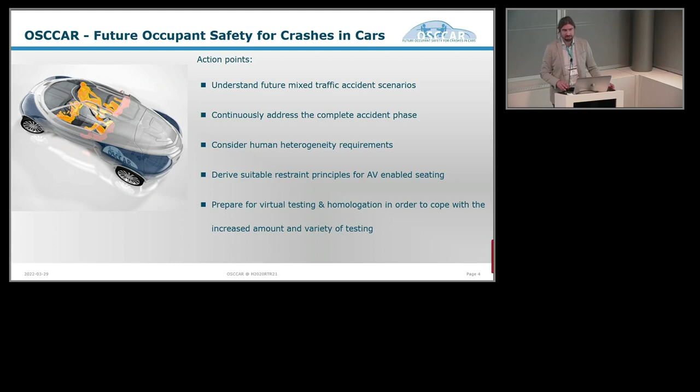And in order to do that, we also had our action point in preparing for virtual testing and homologation, to cope with all this future amount of safety assessment and homologation needs. Therefore, OSCCAR's main objective: understanding future accident scenarios, demonstrating new advanced protection principles, looking into the diverse omnidirectional biofidelic and robust HBMs as one solution for assessing occupant safety and future occupant safety.

Next to the currently used crash test dummies and all well-known crash test dummies, we establish an integrated virtual assessment framework so that we can address complex scenarios for in-crash, pre-crash and mixed traffic scenarios. And to do all that, establish standardizations, paving the way for standardizations for virtual testing procedures that entail and incorporate HBMs and future aspects on all of this.

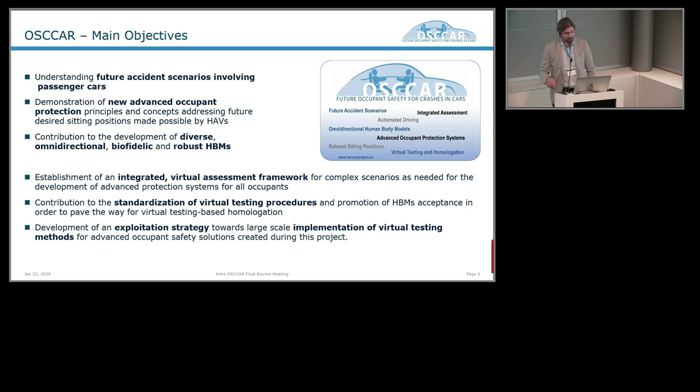You will notice this is all still very much ongoing work, and the world is getting a big step closer to that. As this is a European RIA project, also focusing very much on fostering the European industry, we also develop an exploitation strategy on implementation of all our results, virtual testing and methods in this context.

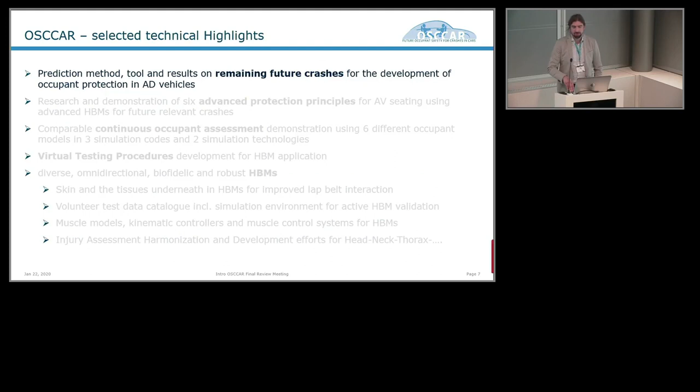Okay, that's what I'm going to talk about today. Just as a summary here, the first part: future remaining crashes in mixed traffic scenarios.

Amongst others, some of our highlights: we were able to simulate future traffic scenarios, not only doing accident research based on already happened accidents, but really looking into the future. Therefore, an open source tool was further developed based on COVISE and openPASS. It can be downloaded, looked at, and used by everybody here for further work.

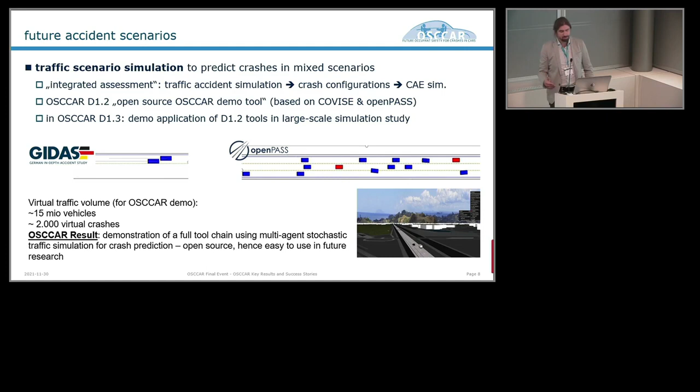In this context, for example, we were simulating 15 million vehicles, leading to about 2,000 crashes. And from that, and lots of other simulations, we were able to predict some of the more relevant future accident scenarios that are going to happen and are relevant for future vehicles.

And those are mostly crossing scenarios. So we're talking here about the straight crossing path scenario and the left turn across path scenario that, apart from what we currently do and what we currently need, will be the main challenges to address.

Just think about sitting in a car and being hit perpendicular to your side or to the other side. So you're not loading the current restraints accordingly, and not optimally protected. In this context, OSCCAR was also able to develop a lot of generic pulses based on state-of-the-art vehicle models that are also free for use and can be downloaded and used here.

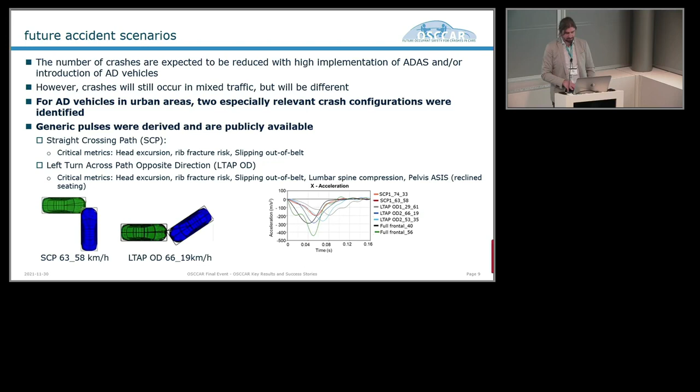Next point, I would like to talk about advanced protection principles we were looking at. Six of them with lots of subgroups, even more diversifying our results here. We were looking at pre-rotated seats, seat inertia, so turning people back into principal direction of force.

Looking at very heavily reclined occupant positions up to sleeping positions for, as you can see here, a very diverse set of people, from very obese to very small, even very small Asian female people, so really smaller of the smaller and going up to the bigger of the bigger ones.

Looking at some kind of living room conditions, having active seat backrests in our vehicles or in our models mostly. And we were also looking at the far side load case that especially Euro NCAP is focusing currently on.

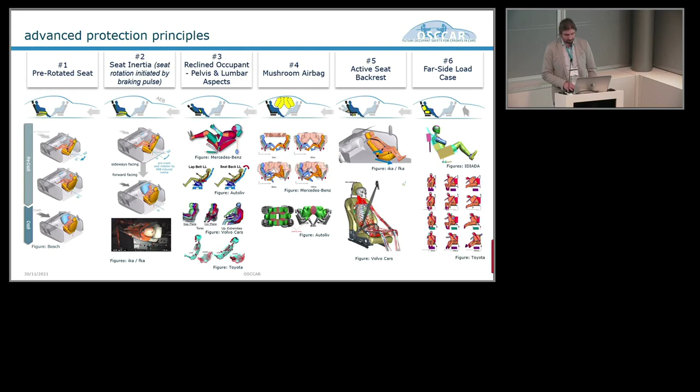All these protection principles were looked at using advanced state-of-the-art human body models, in some cases, or in many cases, models that were even further developed within the OSCCAR project. In order to continuously assess occupant safety,

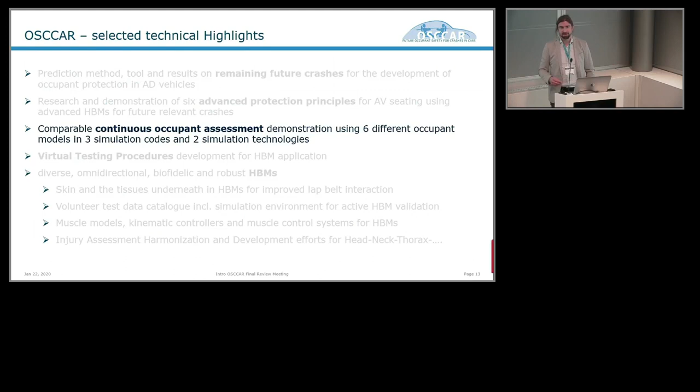you need some kind of tool, some kind of strategy, some kind of method on how to do that. So therefore, OSCCAR was able to develop a positioning tool that can sit all kinds of, or nearly all kinds of HBMs into a standardized or a specific seating position.

This tool is available for download for use, based on Piper, a former European project. Then we are able to provide a kinematic transition from pre and in-crash, not only for finite element models, but also for multi-body to finite element models, for those simulation freaks amongst you - rather complicated and important stuff, benefiting from different calculation speed here.

And we were also able to provide a homologation test case, a comparison test case that compared occupant model capabilities using 3 different solvers and 6 different HBMs in 2 scenarios, pre and in-crash here. So a rather broad portfolio of use cases that can be further worked on and further looked at in future projects and directly go into development here.

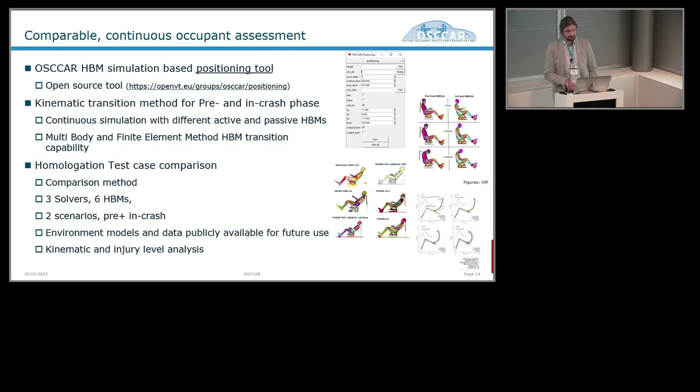Colleagues of ours worked on virtual testing procedures, building originally on projects from many years back for those long-term virtual testing applications here. Very important, virtual testing will not substitute testing.

So there will always be physical crash tests for validating models, for understanding basic feasibility, but we will need virtual testing in order to look at the diverse occupants and new seating positions, where current crash test dummies simply go to their limits.

So we provide here a method how virtual testing can be applied in the future, and I really invite you to look into detail at how this is going to look, and most likely in this or a very similar fashion it will be adopted by Euro NCAP in the next couple of years.

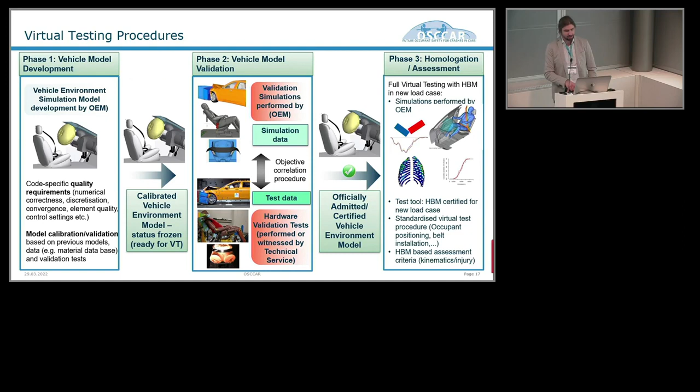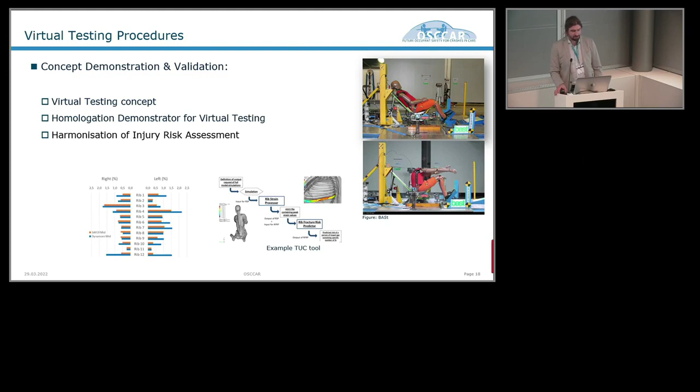Part of this was, amongst others, some physical testing, in this case a very reclined position with a dummy. And important parts here for virtual testing: assessment of injury risks and homologation test case concepts.

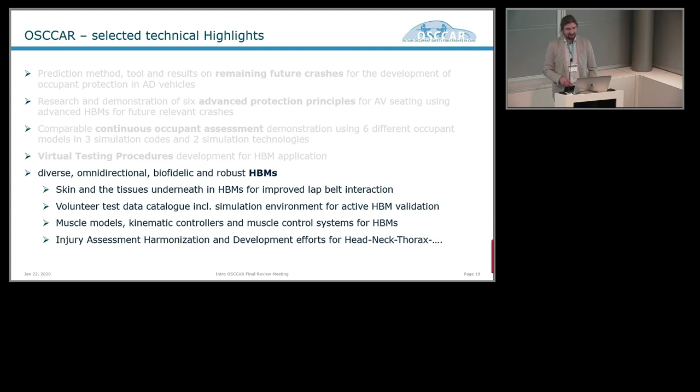And last but not least, as I already mentioned before, we were introducing methods beyond state-of-the-art tools to the currently available, I always like to call it, fleet of HBMs. Astrid is going to talk more about this topic later on. Specifically active HBMs that are able to behave human-like in the pre-crash phase, so an automated vehicle or ADAS-equipped vehicle doing emergency braking or evasive steering. So these are models that can behave correctly or human-like in this context.

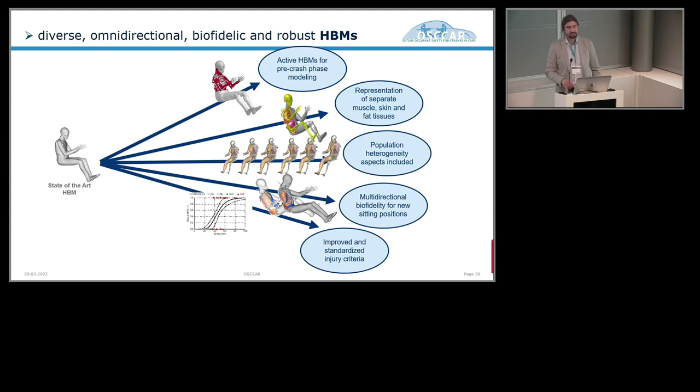Then colleagues were working on representation of skin, muscle, and fat tissue. So this is stuff that ordinary crash test dummies do not even have. Improving models in this direction. Then we were working on population heterogeneity and multidirectional biofidelity aspects. And last but not least, maybe the most critical point for the application of HBMs, improving and finding standardized injury criteria that can be applied everywhere.

So, diverse HBMs in respect to age, sex, stature, and weight were applied and further developed. We have a publicly available validation catalog for active HBMs that were validated with the current models already and can be used by everybody out in the field.

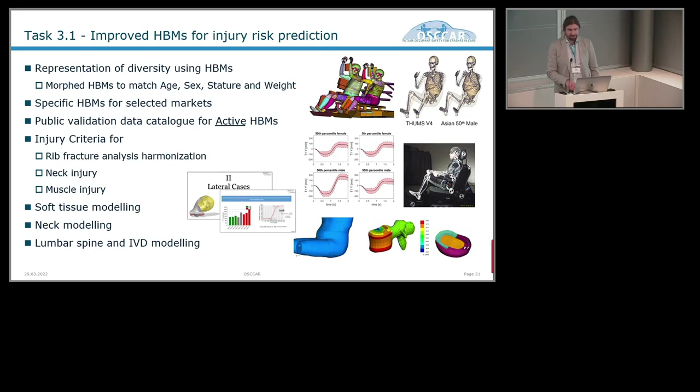Injury criteria were updated in respect to rib fracture analysis, harmonization, neck injury, and muscle injury. Soft tissue modeling was done, neck modeling was done, and lumbar spine and IVD modeling progress and extensions we were able to provide here as well.

Summarizing, as this project is already finished, lots of publications. We have 20-plus public deliverables out of OSCCAR. We're proud of that. Most of them will be available soon after the EU accepts them. We are currently in the finalization of this topic here.

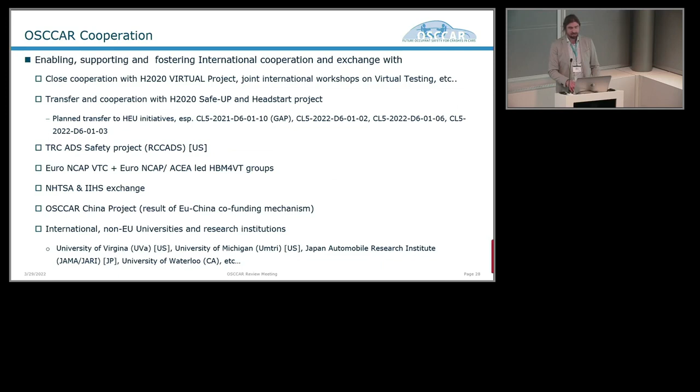Then the Euro NCAP virtual testing group and Euro NCAP HBM for virtual testing groups, led by ACEA and Euro NCAP. Exchange with NHTSA and IIHS in the US. We had a parallel OSCCAR China project running that was funded through the EU-China co-funding mechanism. I'm very proud that this happened successfully. And lots of international cooperation with universities in the US and Japan. Thanks to those making this happen.

Areas of impact: future relevant accident scenarios, our open path tool and generic pulses that are already used outside OSCCAR. The occupant protection principles that we were developing are currently being applied and implemented at OEM and Tier 1 level. And of course, our models and data are used for academic and scientific use.

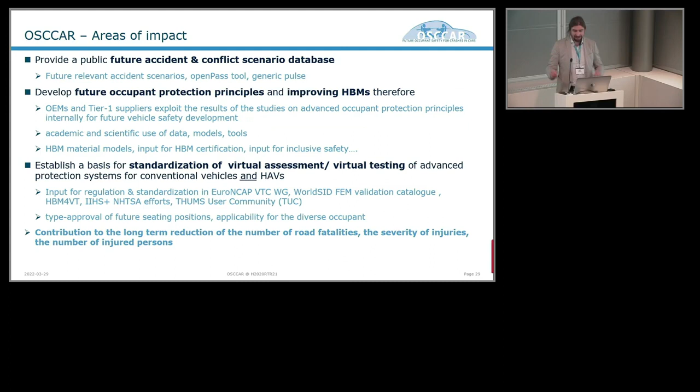And HBM updates are currently implemented at different sites, and also here lots of progress can be expected. Standardization of virtual testing, as I already mentioned, is going mostly into Euro NCAP initiatives currently. In the long term, future type approval is going to benefit hugely from our efforts here. And as Anka already mentioned, the long-term goal of reducing the number of road fatalities and severity of injuries is helped by OSCCAR's results.

Last but not least, questions that you specifically asked for: what is needed in future research. We have a huge gap still for certifying HBMs for definite applications. This is the next critical step for virtual validation and virtual testing here. Injury assessment harmonization was mentioned already, and future AV occupant safety assessment harmonization and goals for that are still needed here. Market uptake, I think I mentioned before, OEMs and tier ones are already using that.

And all kinds of Green Deal, smart energy, 2.0 and CCAM initiatives are currently benefiting here. And we're hoping for virtual testing activities being implemented there. Apart from that, partners from our consortium are currently involved in upcoming European initiatives.

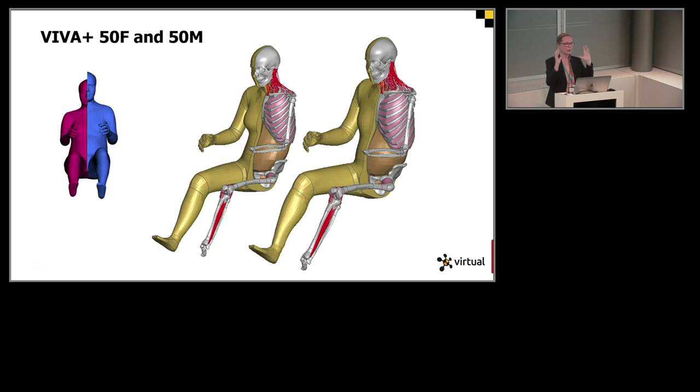I will dig deep down into the human body models directly. Of course, as Werner also explained, we are looking at injury functions, criteria, tools, and so on. So I will just give you a few highlights from the project, so don't think I cover everything here. The human body models, we call them VIVA+ models, of an average male and an average female. You see them here side by side, and you also see the difference in proportion in the red and the blue occupant. So there you see the difference that this average makes.

Broader than that, the tools, of course: the occupant models are then made into standing occupants. The standing occupant is also made so that it can sit on a bicycle. So we have developed a bicycle so that we can look at different bicycle postures and see what is the most severe in terms of postures.

Let's see, do you have a cursor? Yeah, I have it here. You see it? Yeah, excellent.

Okay, we also have a simplified structure of a vehicle for the pedestrian. For the pedestrian also we have a shoe that you need. We also develop open source seat models. These are seat models where we have done volunteer tests, low severity testing. So this is a seat model, open source, that can be used to assess different human body models that you want to use in a test, in virtual testing.

Also, we have a seat model of a Toyota Yaris, where there is a lot of data on how it's performed, in particular in rear impact and how it protects the occupant. And we also address children, so there are a number of child seats that you can use.

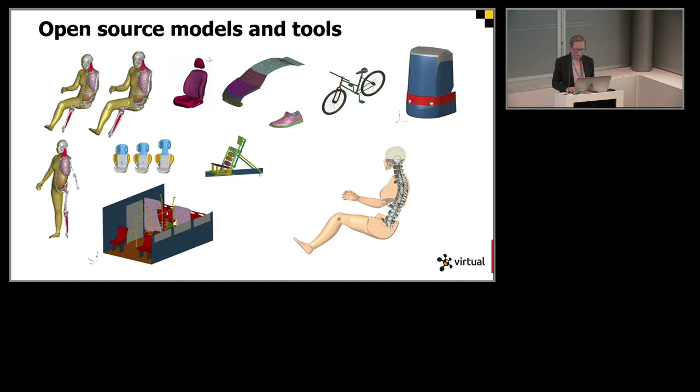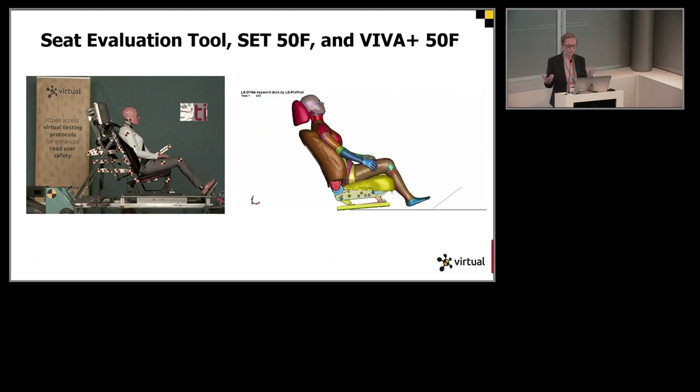So here I will show you the VIVA+ model, the average female, in a rear impact in the Toyota seat. So this is an example of the tools that are available that everybody can access and improve and be part of this big community.

Here you also see actually the first picture of the seat evaluation tool, the physical one, that is now being put together and is doing its first test. We will have an equivalent SET. Here you see that it's the average female, also of the average male, and starting to build our knowledge on this platform.

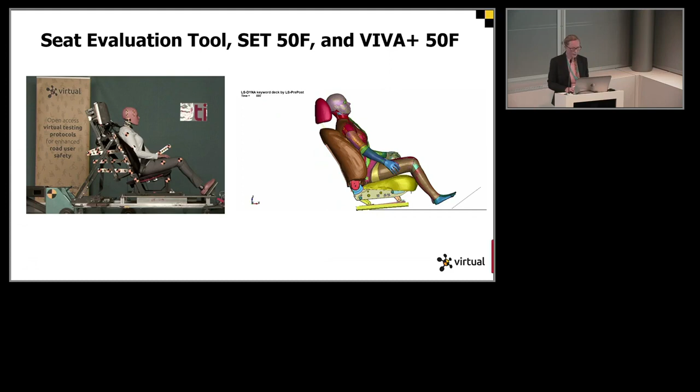So, looking at the volunteer test for the standing occupant in public transport, there we looked in particular at how you maintain balance when you are on a moving platform. And looking at normal driving, not emergency events, like takeoff and braking, because there we saw from the injury statistics, and this one was from Melbourne, from this big tram system, that there were actually injuries caused during normal takeoff and braking.

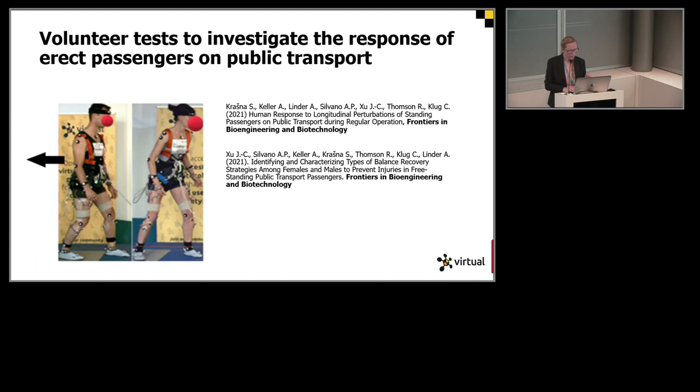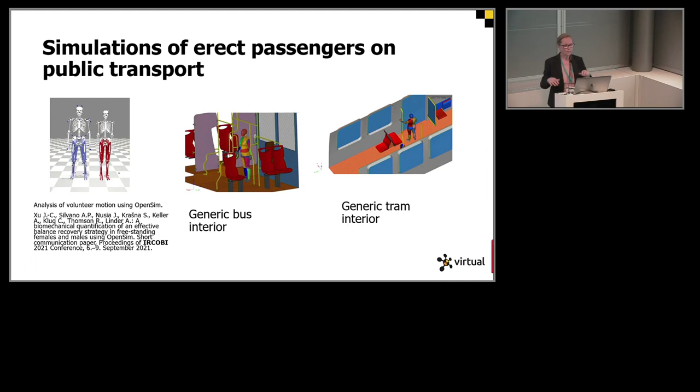So we did a series of volunteer tests to identify what motion patterns are the most efficient in terms of maintaining balance, as an example. And then we took the data further into the simulations, first working with OpenSim to look at the motion broadly, and then into these active muscle models that Werner also told you about, that respond to the motion.

We have had 3 events. First, we had a virtual OSCCAR pioneer event, and then we had 2 virtual OSCCAR workshops where we were able to gather the stakeholders globally and have Euro NCAP, Toyota with the THUMS model, and the Insurance Institute for Highway Safety, as an example, to show and describe where they are. And actually, during this project, the THUMS models were made publicly available. Before, they were only available if you paid a fee. So yeah, that was one example.

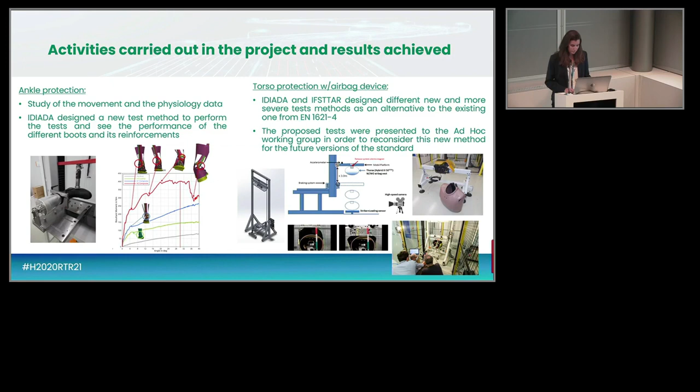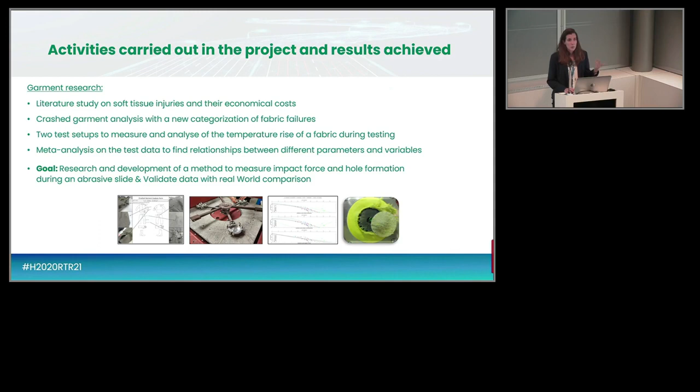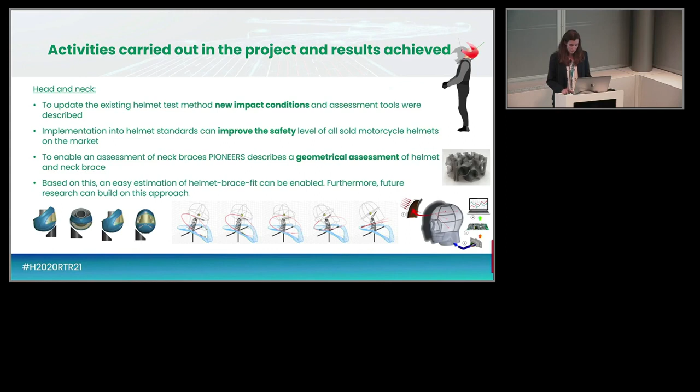On the motorcycle side, Piaggio studied the safety of the leg cover, which was used to mitigate small shocks and wounds in urban scenarios with slow velocity and crowded conditions like traffic jams. They started with a simulation to design the cover, then simulated with a pendulum test to evaluate performance, and finally carried out a full crash test comparing the virtual simulation with the real crash test to obtain reliable data.

Another way Ducati studied was lateral airbags developed in the project. These airbags were in the laterals and designed to protect the injuries suffered by riders on lower limbs, like the legs. They were specified for impacts at low speed and to avoid lateral impacts, the same as the Piaggio motorcycle.

In the Ducati, there was installation inside a real motorcycle. Then there were simulations to study the behavior of this development with the airbag, and finally a real full crash test to correlate the results with real data with simulation data.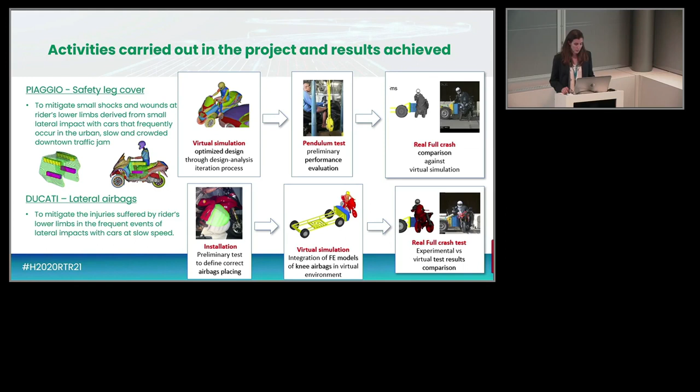On the pre-crash braking, it was included in a real motorbike, so participants and volunteers made tests with this pre-crash braking motorcycle. The results were not 100% positive. Some participants reported problems about the maneuvers and control of the motorbike, but the majority of the results were positive. Due to that, it was encouraged to keep testing with this kind of motorbike and methodology.

As well, in this project there was development of communication between the motorcycle and the protective equipment of the rider. An algorithm was developed, and with the specified technology implemented, it all worked together quite well. Requirements were defined, and security was developed as well. The system overall was well implemented, and there were 3 airbag jackets vendors that showed interest in implementing this system in their jackets.

The vision of this project was to reduce the number of accidents, injuries and fatalities on powered two-wheelers. In order to do that, they wanted to increase the performance, usage, and comfort of the personal protective equipment, and also introduce new onboard systems and devices on the motorbikes.